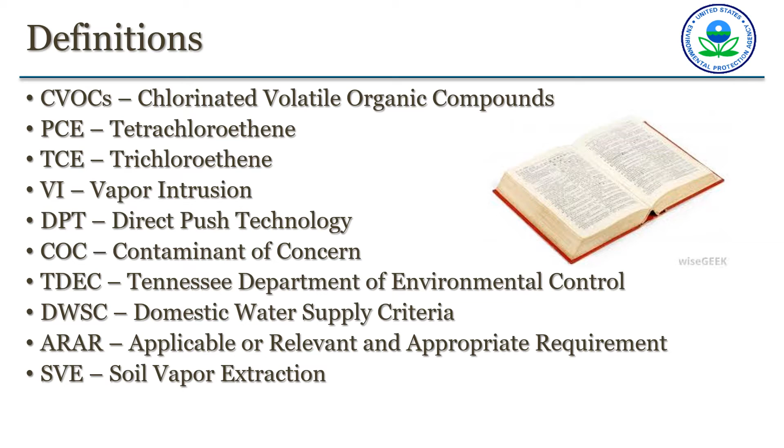So now I would like to talk about the Interim Record of Decision that was signed September 27, 2018. This document outlined the major components that EPA plans to implement in Alamo to remediate the contaminated groundwater. The first thing we plan to do is install and operate a soil vapor extraction system near the former Ward's Dry Cleaners building in order to remove contaminants that may have stayed in the soil that could be leaching down into the groundwater as a potential source.

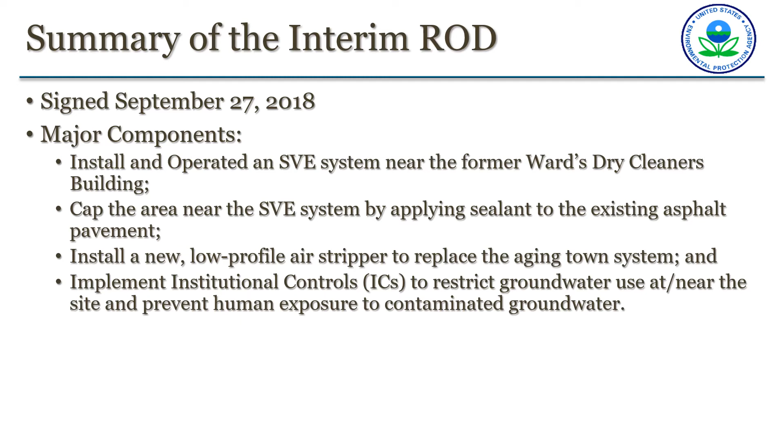We're going to cap the area near the SVE system by applying sealant to the existing asphalt pavement. We're going to install a new low-profile air stripper to replace the aging town system and implement some institutional controls going forward to restrict new groundwater use at or near the site and prevent human exposure to contaminated groundwater.

In the interim record of decision, these are the following remedial action objectives. For the soil, we wanted to prevent the migration of contaminants in the soil that could result in groundwater contamination in excess of our federal or state ARARs. And for the groundwater, we wanted to prevent unacceptable risk to human receptors from exposure to the groundwater used as the source of the town's drinking water. And we want to restore the groundwater that is considered a drinking water source threat to the beneficial use of the community.

So a little bit about the remedial design, which was conducted in 2019. Again, this is the phase in the Superfund site cleanup where the technical specifications for cleanup and remedies and technologies are designed. And the final design of the soil vapor extraction system and proposed sampling schedule were developed going forward and field tested. And it was reviewed by EPA's National Risk-Based Priority Panel prior to funding.

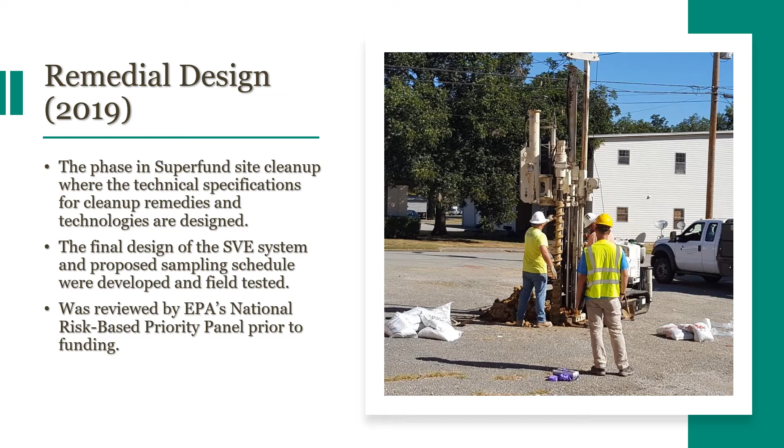This is a fund lead project, and what I mean by that is that the EPA is going to be paying for this remedial action. There's no responsible parties at this time that will be contributing to the cleanup.

So now I'd like to talk to you about the air stripper component of the remedial action. As you know, Alamo has had an air stripper in town since 1991. That system was getting very, very old and needed to be replaced. So one of the major components of EPA's remedial action was to replace that aging system with a new system. So the town of Alamo actually went out and obtained grant money while we were doing the remedial design and got the grant money to install their own air stripper, which is great news.

The new air stripper that the town has installed had a design flow rate of 625 gallons a minute, which far exceeds what we were asking for in our record of decision of 250 gallons a minute. Accordingly, this air stripper replacement that the town conducted fully complied with what we were asking for in the ROD, and that part of the remedial action is already complete. And the system is online. We are overseeing it with TDEC's help to make sure that it is up and running as it should and containing the contamination as it is meant to do.

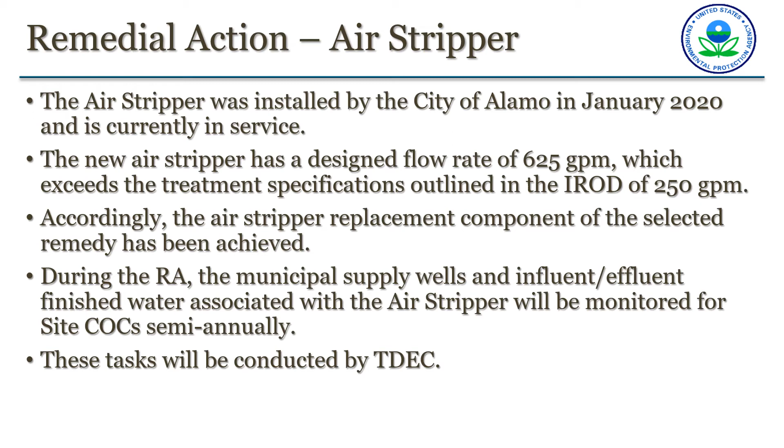So during the RA, the municipal supply wells and the influent and effluent finished water associated with the air stripper will be monitored for the site contaminants semi-annually, so twice a year. And those tasks will be overseen by TDEC.

So what exactly is an air stripper and how does it work? An air stripper is a tall cylindrical tube in which contaminated water enters into the top of the tube. The contaminated water is then sprayed over some packing material. And as the packing material helps filter the water down through the tube, high pressure air is blown into the bottom of the tube. The contaminants that we're dealing with at this site are chlorinated organic compounds.

And when introduced to air or the environment, they tend to vaporize, evaporate in essence, rather quickly. So as we blow the air into the bottom of the air stripper, it goes up through the packing material, removing the contamination from the water through this vaporization process. Those vapors are released out the top of the vessel or sent off to treatment. And the clean water comes out of the bottom of the air stripper into either additional treatment or distribution.

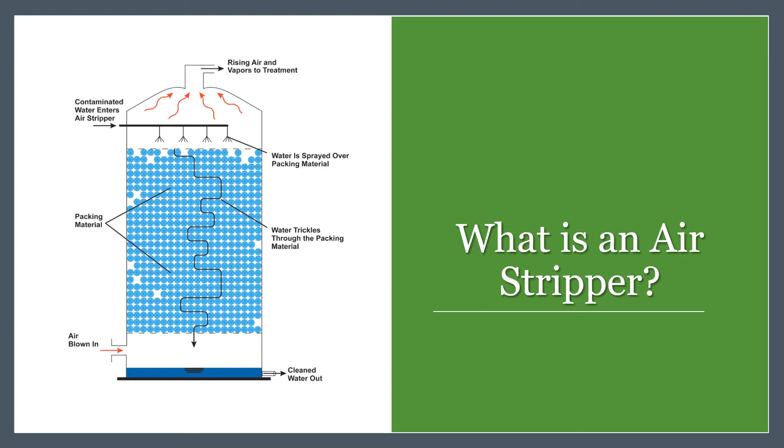So as I mentioned earlier, now I'm going to talk about the soil vapor extraction component of the remedy. The soil vapor extraction system will basically be installed and operated to remediate the contaminated soils in the former Ward's dry cleaners area. This was field tested and field verified during the remedial design. So basically what this will do, it will prevent further leaching of contaminated soil to groundwater at the site, and will be reduced by applying a sealant to the existing asphalt at the Ward's dry cleaners area.

And the reason why we want to put the sealant on the parking lot is that it prevents two things. It helps us get a good vacuum under the surface, and it will also prevent any future rainwater or storm water from entering through the cracks in the pavement and getting into our system, causing additional leachate.

So as part of the SVE Interim Action, performance monitoring will be conducted to monitor the effectiveness of the system, and we will also continue to monitor the numerous groundwater wells that we have throughout the community, which I think there's 12 of them, and will be monitored annually while the SVE system is in operation. And this is going to help us determine overall if the combination of the soil vapor extraction system and the air stripper are doing their job in reducing site contaminant levels in the town.

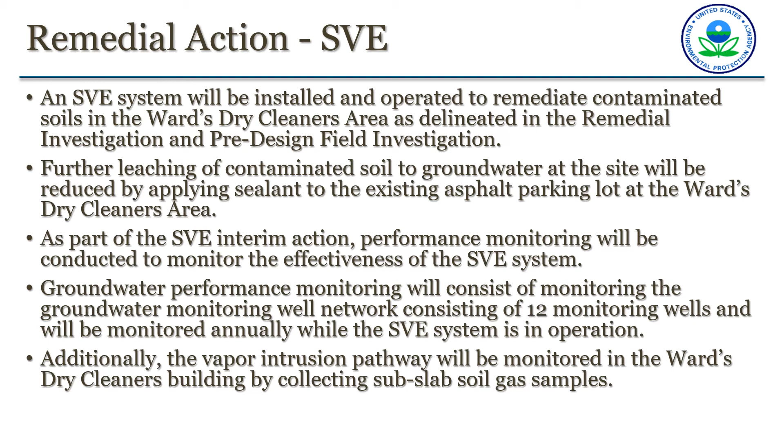So how exactly does a soil vapor extraction unit work? So what we will do is we'll be installing some wells all around the Ward's dry cleaner building and in the parking lot. And those wells will be connected through some piping and hooked up to a vacuum treatment unit. This will be a small unit on a pallet. It'll mainly look like a large generator. It'll be enclosed inside a building, so you will not be able to see it, and we'll only be operating it during the daylight hours so that there will not be a noise issue during the night.

So what that vapor treatment unit does, what the vacuum pump does, is it puts a vacuum on the soil, on those wells that we install. In essence, what it does is kind of like the air stripper. It basically sucks the vapors out of the soil, because as I mentioned earlier, VOCs volatilize very easily.

So what we plan to do is vacuum those vapors out of the soil. They come through the vacuum pump to the treatment unit where the vapors are treated and released as exhaust. And any condensate that we collect will be drummed and disposed of.

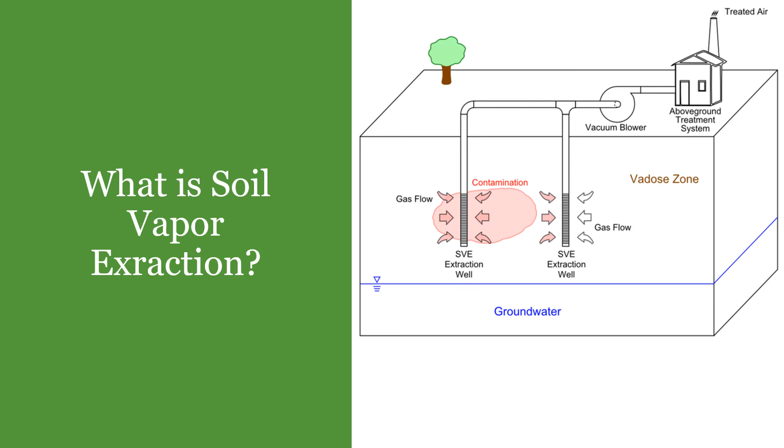So now I'd like to talk to you about any potential community impacts that may come from the system. As I mentioned earlier, the newly installed air stripper is already installed, and it is directly next to the old air stripper. The town plans to keep the old air stripper in use as more of a backup redundant system, basically increasing the capacity of water that the town could treat.

As I said, this has been in operation since 1991. This new air stripper is updated technology and should not cause any disruptions to the community, as they are already familiar with this kind of treatment. As for the soil vapor extraction unit, it will take approximately 2 to 3 months to construct, and it'll run for a period of up to 3 years or until we meet our remedial action goals.

While in operation, the system will be continuously running, causing some noise, like I said, kind of like a generator. However, the system will be enclosed, and it will only operate during business hours, I would say. All vapors associated with the system will be continuously monitored and will pose no threat to the surrounding community.

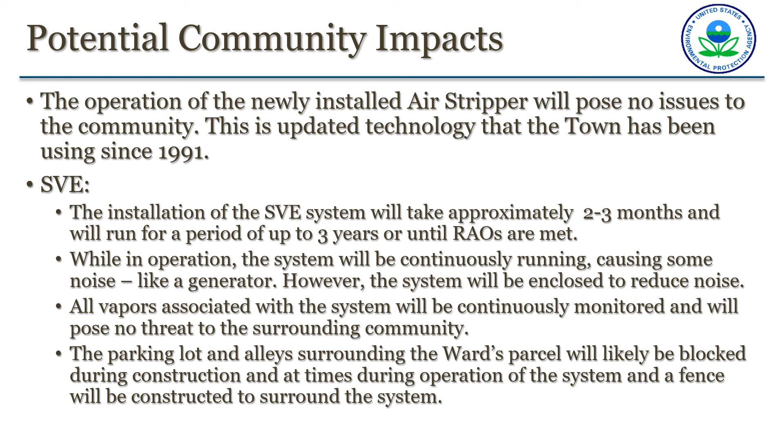The only disruption I can say during construction, there will be some temporary road closures around where we're installing the system. There's some alleyways that I know are heavily used around that part of the site. We might have to close those off for a time in order to let our construction crews install the wells and the piping needed for the system. And we will also have a fence surrounding our work area while we're doing the construction.

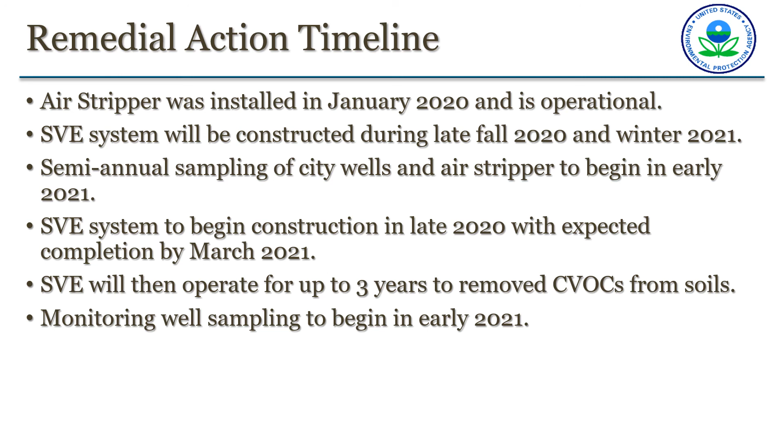Then once constructed, the remedial design calls for the system to operate for up to 3 years to remove the chlorinated solvents from the soils, and the monitoring well sampling will begin concurrently with the SVE system coming online, likely in early 2021.